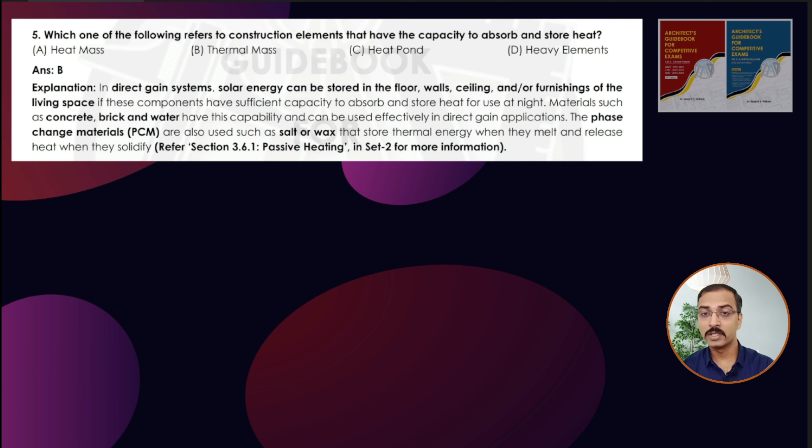So here the correct option was option B. If you have read the theory related to this direct gain system in Set 2, then answering this question would have been very easy. The correct option was option B, so the first 2.5 marks you could have achieved here very easily. So 2.5 is your score till this question, the first question of question 5.

The next question was question 7: Which one of the following indexes is the temperature of calm air at 50% relative humidity, which imparts the same thermal sensation as the given environment? Options were temperature humidity index, thermal sensation index, heat stress index, and tropical summer index. Again, similar to the previous one, we have discussed the theory related to the correct option in two earlier GATE papers - GATE 2022 question 65 and GATE 2018 question 11. You can pause the video and check these respective questions. So the correct answer for this question was tropical summer index.

If you refer GATE 2018 question 11, you can see that the definition mentioned in question 7 of UPSC-CPWD is given in the explanation. So I'm just reading from the explanation. Tropical summer index, shortly called TSI, is defined as air or globe temperature of the still air at 50% relative humidity, which produces the same overall thermal sensation as the environment under investigation or under consideration.

This definition was given in question 7, and they are asking which term this definition refers to. The correct answer for question 7 was option D, tropical summer index. I have also provided the formula to calculate the tropical summer index, which you can see on your screen. Based on this formula, a numerical answer type question was asked in the recent GATE paper, GATE 2022 question 65.

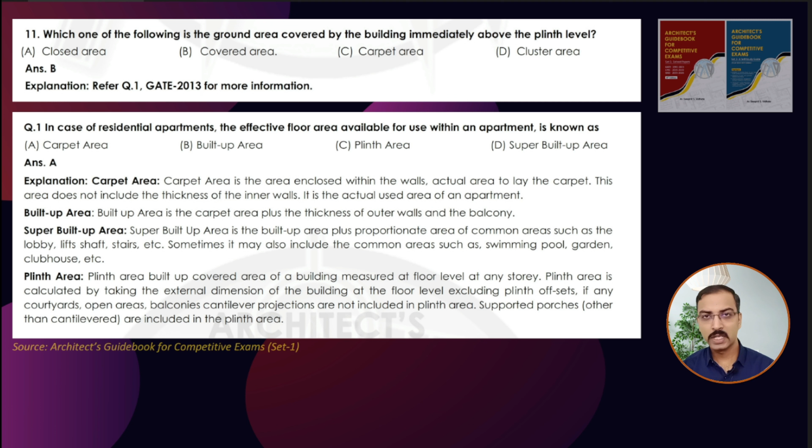But supported porches, other than cantilevered porches, are included in the plinth area. So the correct answer for question 11 of UPSC-CPWD was covered area, option B. Very easy to answer, because carpet area is definitely incorrect, given in option C. Cluster area is not related to the ground area inside a building. Closed area is definitely not a technical term, so it's not correct either. The correct option was B, covered area, adding 2.5 marks, for a total score of 10 till this question.

Question 12: The author of the best-selling popular novel The Fountainhead, that celebrated the idea that the prime generator of built form is the creative power of the individual architect. This question, related to this book and its author, was earlier asked in GATE 2011 at question 37. Selecting option B was not difficult, since most of you must be aware of this author and this book, The Fountainhead. So this was one of the easy questions.

As I said, the related question was there in question 37, where again it was a match-the-pair question. So the answer for question 12 of UPSC-CPWD was option B, adding 2.5 marks, for a total score of 12.5 till this question.

The next question, question 13: as described by Kevin Lynch in his seminal work The Image of the City, which of the following are points referred to as the strategic points in a city into which an observer can enter, and which are intensive foci to and from which he is traveling?

We have discussed the five principles defined by Kevin Lynch in The Image of the City in Set 1 as well as Set 2 of the Architect's Guidebook. The related GATE question was in GATE 2009, question 26, where we explained and discussed all five of his principles and definitions.

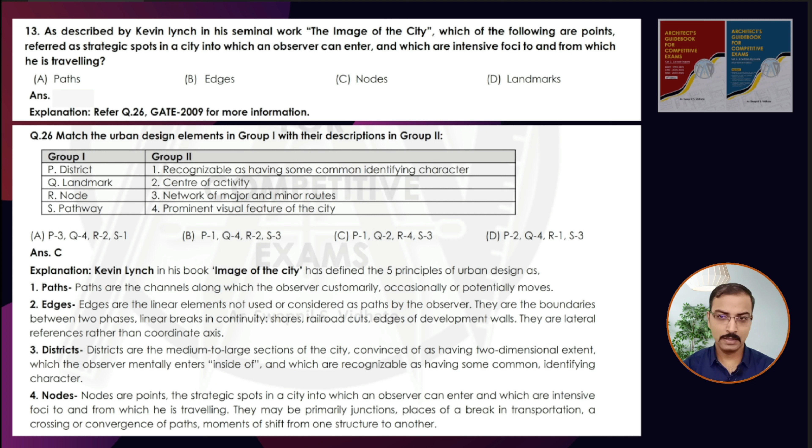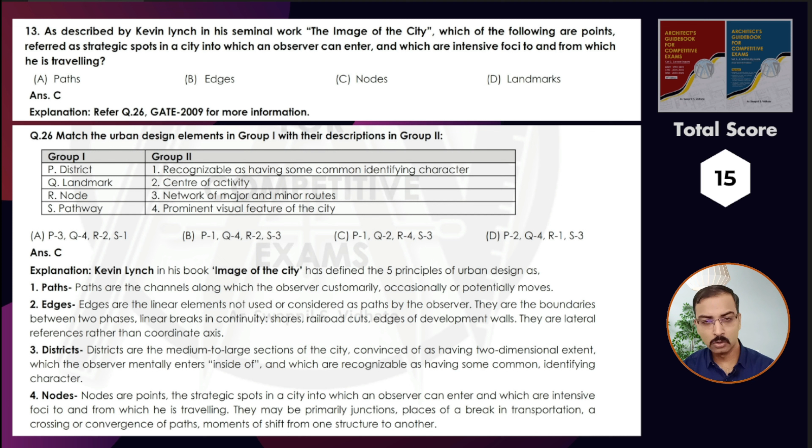So answering this question was not difficult, if you have read and carefully revised both Architect's Guidebooks multiple times. Selecting option C was not difficult. Total score till this question would have been 15.

Question 18, again the easier one: the radiant city concept was originated by. Similar to the previous one, selecting option B would not take more than a second if you have done careful revision of previous year question papers and the theory available in Set 2.

Earlier the question was asked multiple times. As you can see on your screen, question 31 of GATE 2023 was a match the pair question, in which we have discussed that radiant city has been defined by Le Corbusier.

The question related to this similar term was earlier asked in GATE 2021 question 33, GATE 2004, and GATE 2006. You can pause the video and check these respective questions to analyze how many different ways the question has been asked. The correct option was option B, Le Corbusier. Total score till this question would have been 17.5.

The next question: in the context of the seminal work on Cities in Evolution, the pioneer who has articulated the place-work-folk interrelationship is which of the following? Similar to the previous one, we have discussed the triangle given by Patrick Geddes in his seminal work, Cities in Evolution. The related question was there in ISRO 2019, similar to the UPSC-CPWD exam.

This ISRO 2019 was again a recruitment exam paper. Question 50 was based on this information, and the reference was also there in GATE 2005 question 75. As I just said, this question 50 of ISRO 2019 is there on your screen. So Patrick Geddes, who has been called the father of modern town planning, gave this principle, the triangle of folk, place, work.

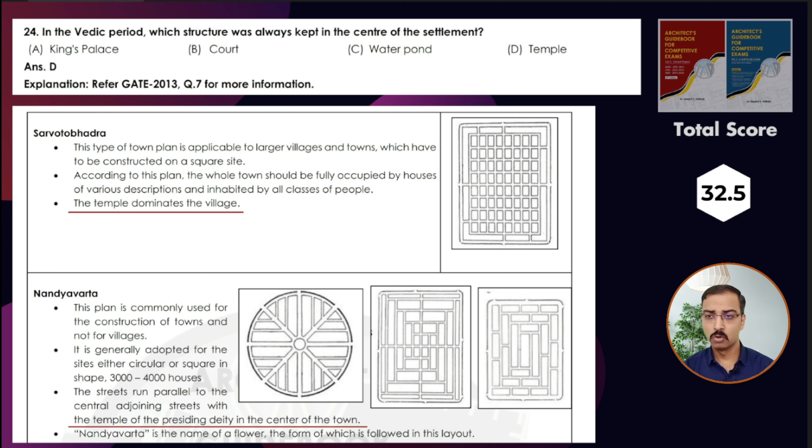Easy to answer because the reference was there in the previous question paper in set 1. So 2.5 more marks you could have achieved here. Total score would have been 32.5.

Question 25. As per the Manual of Architecture Practice of the Council of Architecture, which of the following tenders quotes a fixed price? Please underline this word, fixed price. If the quote is varied, it involves contractual problems and methodology to arrive at the rates for addition, deletion and alteration would be necessary, and it is to be built in the tender document. As soon as you read the word fixed price, you can answer it quickly that it is a lump sum tender.

Why am I saying this? Because we have earlier discussed these types of tenders in UPSC-CPWD 2016 in question 60. Here I have provided the definition. In lump sum tender, the contractor undertakes to carry out the work as shown on the plan and specification till completion. For lump sum tender, your drawing should indicate each and everything, because the contractor will quote his tender price based on whatever is available on the drawing and what specification has been provided related to the plans, sections, or all the quantities shown on the plan.

If in case there are some changes, then the contractor may ask for a different amount which he has not quoted at the time of submission of his tender. So it involves contractual problems. There will always be dispute. He will, in technical term or in government term, call it a deviation order.

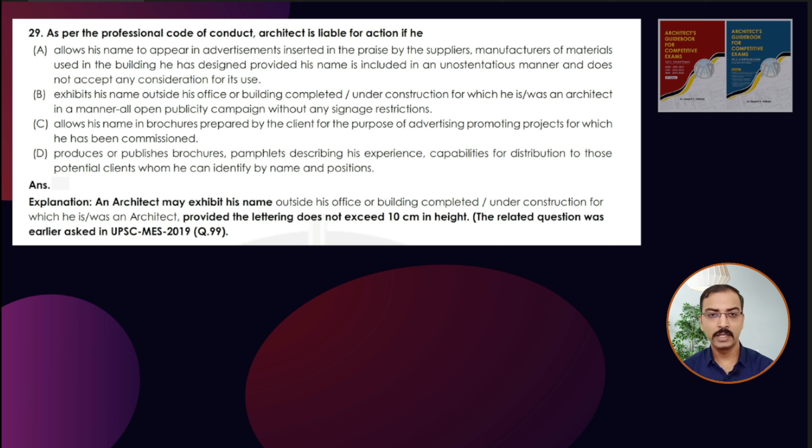The related question was earlier asked in the UPSC MES recruitment exam question paper of 2019, question 99. So the related question was there in the previous UPSC recruitment exam for architects. I think selecting option B was not difficult. Total score till this question would have been 42.5.

Question 31: Dolmen, Robie House, Villa Shodhan and Falling Water are examples of architectural compositions which can be categorized under - options given are A. planar compositions, B. angular designs, C. columnar designs, D. architectural gallery designs. The question related to Robie House, Villa Shodhan, Falling Water and even the Dolmen were asked in previous GATE question papers.

One by one we will go through the options. Robie House, Villa Shodhan and Falling Water - Villa Shodhan designed by Le Corbusier, Falling Water designed by architect FLW. Both these houses do not follow the architectural gallery design pattern, so option D is definitely incorrect.

Option C is columnar designs. Now both houses are not just made of columns - they do not follow only column designs. The same applies for Robie House as well.

Option B says angular designs. Now you can see that all these houses, in plan and section, follow perfectly horizontal and vertical planes - they follow a linear pattern, not angular designs. The walls are not arranged in any angular way, so angular design at option B is also incorrect.

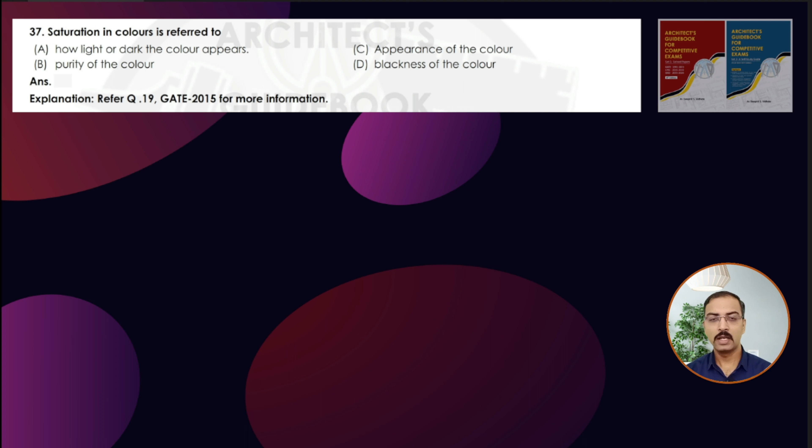Multiple times the question based on color theory have been asked in the previous GATE exam question papers, also in recruitment exam question papers. Question 19 was: the saturation level of a color represents what? The correct option here was brilliance.

Saturation defines how pure or how bright the color is. In the explanation, saturation defines lightness, meaning 100% bright or light color is fully saturated. If you go on adding gray, the fully saturated color will be the pure color, while totally unsaturated color will be the darker one, full of gray.

Question 37: saturation in color is referred to as the purity of color. As explained, saturation defines lightness, meaning 100% original color is the pure color, and as you go on adding gray, it will reduce the saturation level. So option B was the correct one.

Multiple times the question based on color theory have been asked, so it is expected that the candidate is aware and understands each property and its significance by heart. One more question based on color theory was asked in this same exam paper, which we'll discuss soon. So with 2.5 more marks, total score till this question would have been 60.

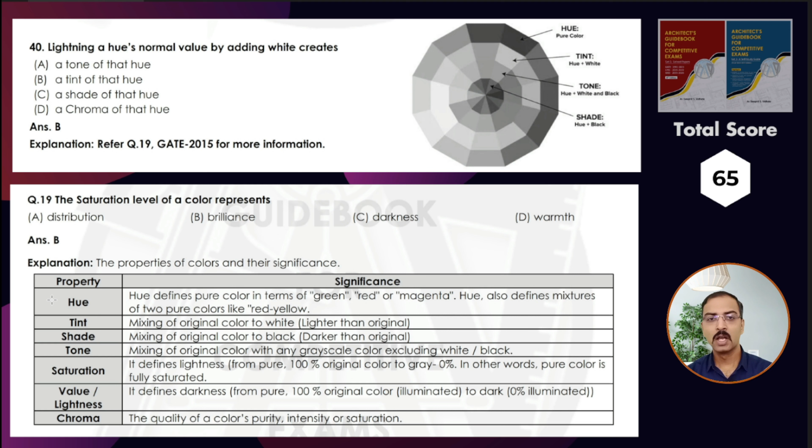If you have gone through this property and its significance, answering this question was not difficult, but for that you need multiple revisions and thorough understanding of this concept of color theory. So total score would have been 65 by adding 2.5 more marks.

Question 41: match the following. In group A they have mentioned the solid forms, and in group B they have mentioned the descriptions. You have to match the correct pairs. Group A has mentioned sphere, cylinder, pyramid, cone. We will go by the description given in Group B one by one.

The description mentioned at serial number 1 is a solid generated by the revolution of a right triangle about one of its sides. Consider this right angle triangle, and you are revolving it along one of its sides. When you revolve the right angle triangle along this side, it will create the cone, which is mentioned at serial number S in group A.

So the first correct pair will be S1. Observing options A, B, C and D, the only option which matches this correct S1 pair is option B. So none of the other options are correct.

You can also check the other pairs. In option B, they have matched R with 2. For R, pyramid, they have matched a polyhedron having polygonal base and triangular faces meeting at a common point or vertex. Yes, that is a correct explanation — pyramid has a polyhedron with a polygonal base and all its faces are triangular, meeting at a common point or vertex.

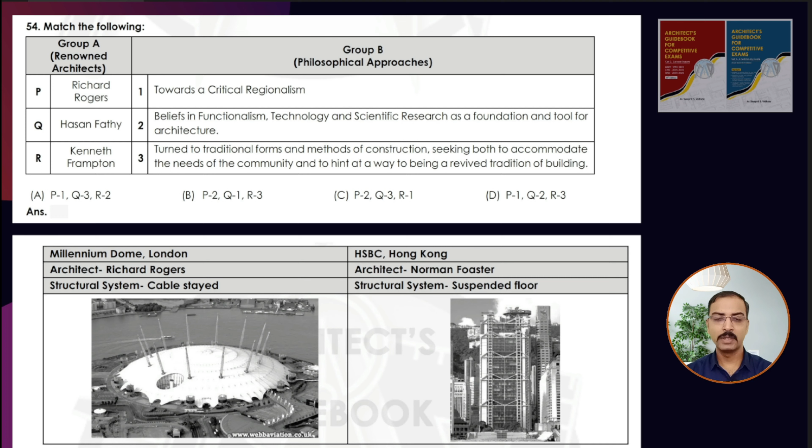The only remaining architect mentioned at serial R, Kenneth Frampton, is famous for his essay on the subject of 'towards a critical regionalism.' So the last and only remaining pair is correctly mentioned at option C, which was the correct answer for question 54.

So you could have selected option C because the question based on the work of architect Hasan Fathy, the Egyptian architect, was there in one of the previous question papers. And again, Richard Rogers is associated with functionalism, use of technology and scientific research, for this particular question 54 of UPSC CPWD. So total score would have been 77.5. I have considered 2.5 marks for this question.

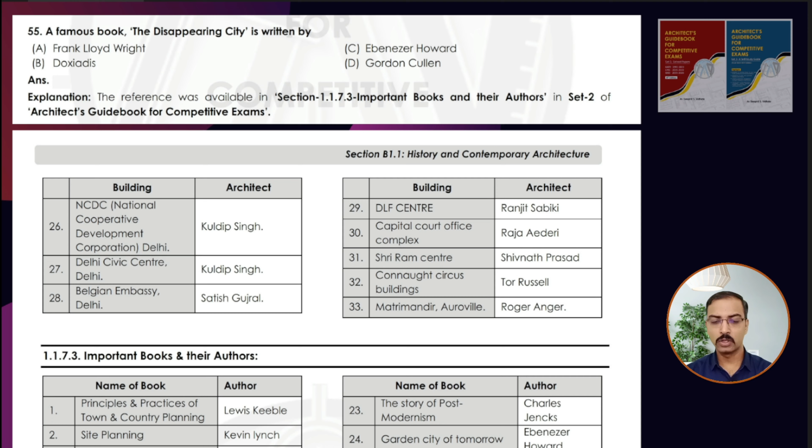The next question, question 55: a famous book Disappearing City is written by which of the following architects? The reference was readily available in section 1.1.7.3, in which we have discussed important books and their authors in set 2. I will show you the list - this subsection, important books and authors, in which I have covered at serial number 38 this Disappearing City, which is written by FLW, Frank Lloyd Wright. So selecting option A was the easy one because you have read this in set 2. If you have done multiple revisions of set 2, then answering this question was very easy. So more 2.5 marks I will consider, and total score would have been 80 till this question.

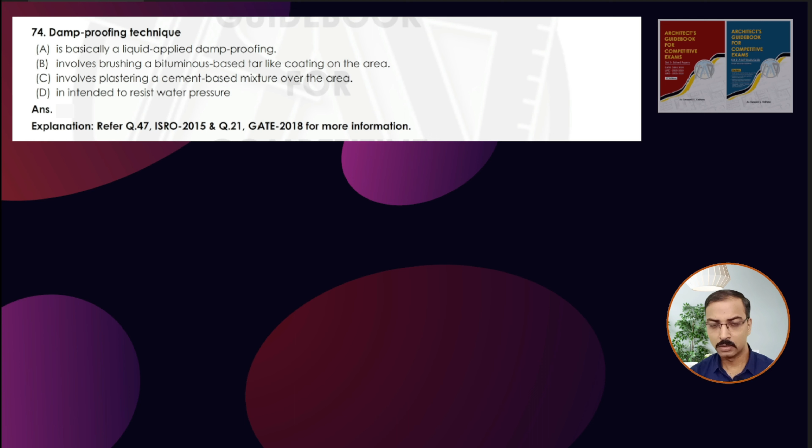So option B was the correct one. The reference was available in ISRO 2015 question 47 and GATE 2018 question 21. In ISRO 2015 question 47, one statement asked which of the following statements are true, and sentence number 2 mentioned bitumen felt is used as a damp proofing material. This sentence was correct, so statements 2 and 3 were correct. You would have read this in that recruitment exam question paper. So for question 74, the correct option was B. More 2.5 marks could have been added here, total score would have been 97.5.

The next question, question 75: which one of the following is the maximum population size of a species that an ecosystem or habitat can support indefinitely? Options were A maximum, B sustainability, C carrying capacity, D biomagnification.

The information related to the correct option for this question was available in GATE 2022 question 77, which asked: which among the following is or are the components of the assimilative carrying capacity of urban environment? Notice the word carrying capacity. As discussed in the explanation, assimilative carrying capacity is defined as the ability of the environment or a portion of it, such as streams, lakes, air mass or soil layer, to carry waste material without adverse effect. Beyond a certain limit there will be environmental degradation - the environment can't carry a lot of burden beyond a certain threshold, its carrying capacity. As given in question 75, the maximum population size of a species that an ecosystem or habitat can support indefinitely is called the carrying capacity.

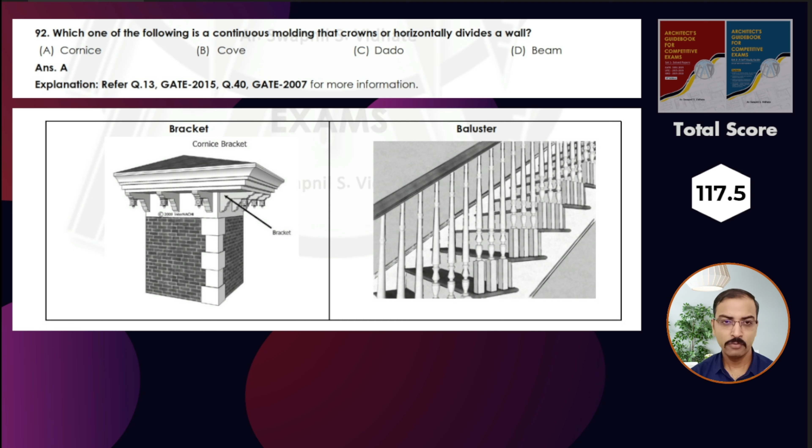Question 93, which one of the following is a measure of brightness of a light source or an illuminated surface? The information was readily available in GATE 2006 at question 68, where we discussed all these terminologies. The correct option was option D, luminance. Luminance is the quantitative property which gives the strength of the source of light. Whenever you go and buy a light source, we generally ask what is the luminance that particular light source is providing. So brightness of a light source or illuminated surface is measured in terms of luminance, which is option D.

So the reference was readily available. I will consider 2.5 marks for this question. Total score would have been 120 till this question.

Question 95. Which one of the following is the key proponent of 7 principles of universal design that is also widely applied in the design of interior spaces as well as outdoor environments? Options were Ronald Mace, Marion Roberts, Nabil Hamdi, and D. Frank Lloyd Wright.

Now, this question related to universal design was previously asked in GATE 2022 at question 40. Also, the question was there in GATE 2014 at question 47 and GATE 2009 at question 25.

So the architect who coined this term universal design is Ronald Mace, which is mentioned at option A. He gave the 7 principles of universal design.

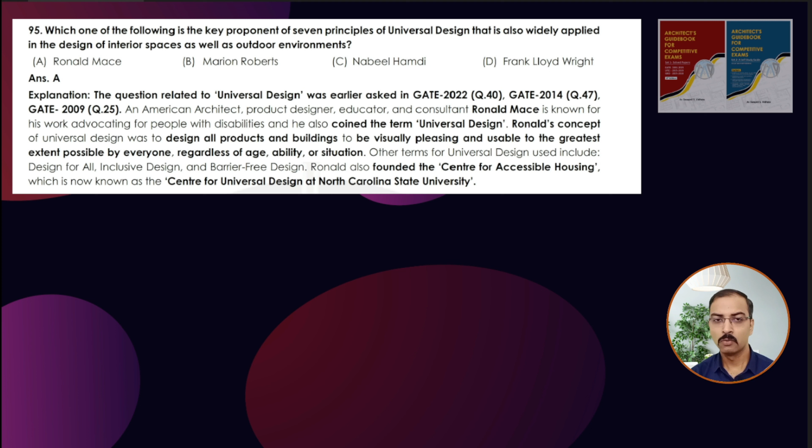If you have done the revision and in your notes made this addition that this universal design term was coined by this architect, then selecting the correct option for this question was not that difficult. Total score would have been 122.5.

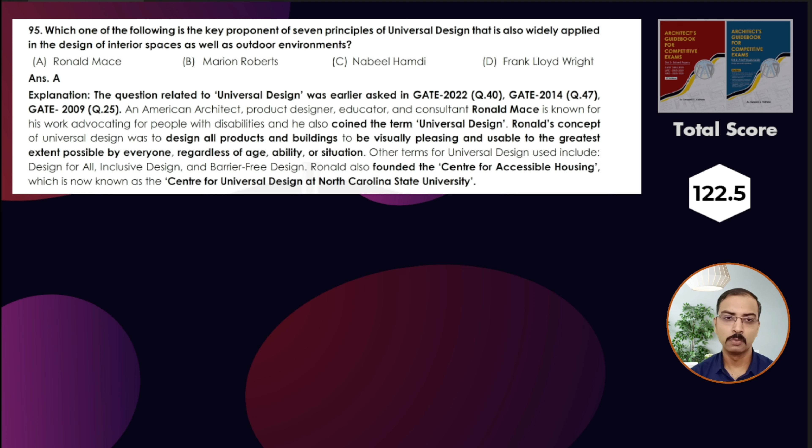The next question, a little bit tricky or difficult, but we have also covered the theory related to the correct option. Question 98 was, which one of the following provides to describe design principles and elements, that is contrast, symmetry, wideness and constriction, threshold and vistas.

Which can help the designer to control spatial compositions in design? Option A, imageability, B, theories of Gestalt, C, figure ground thinking, and D, Bauhaus techniques.

The correct option for this question was theories of Gestalt, according to me. The reference was there in GATE 2011 at question 34. We have discussed all his laws, Gestalt laws of visual perception, in set 2 as well as in set 1.

So the correct option here was option B, theories of Gestalt, right? Total score till this question would have been 125.

The next question, 101. Which one of the following is the lowest inside point of a pipe, culvert or channel? So a similar question was there in one of the previous question papers, in GATE 2015 at question 20.

Question 20 says invert level of a pipe at a given cross section refers to. So the question was the opposite in nature.

In question 101, they have given the definition and they are asking which is the suitable term for this definition. In question 20, they have mentioned the term, and we have to select the corresponding definition from the given options.

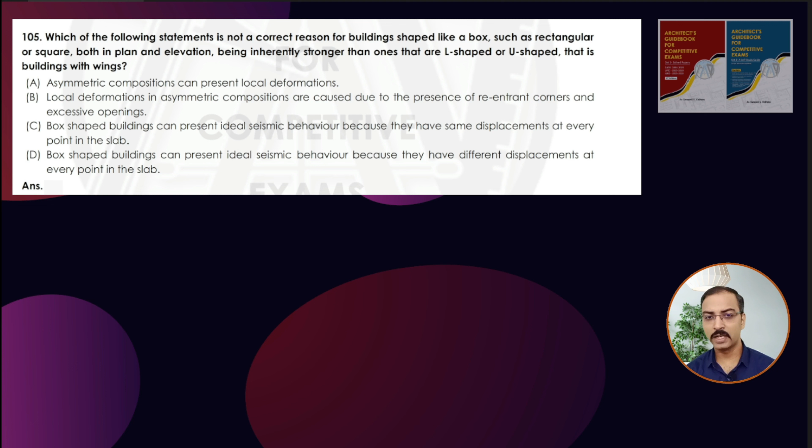Now this is the incorrect statement. The reference was there in UPSC-MES 2019 question paper at question 12.

A similar question was there in UPSC-MES, question 12. You can see on your screen: for minimizing the impact of earthquake, which of the following solutions are proposed for an L-shaped building? We have to select which solutions we can choose among the options given.

In question 34 of GATE 2018, we have also discussed the solutions or building structures, shapes and configurations for earthquake-resistant buildings. We discussed that box-shaped buildings are ideal if we talk about earthquake resistance, since they present ideal seismic behavior because they have the same displacement at every point in the slab, which is given at option C, the true statement.

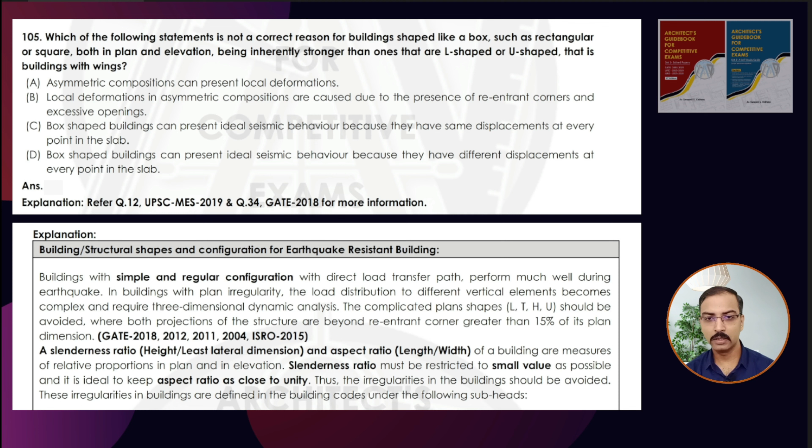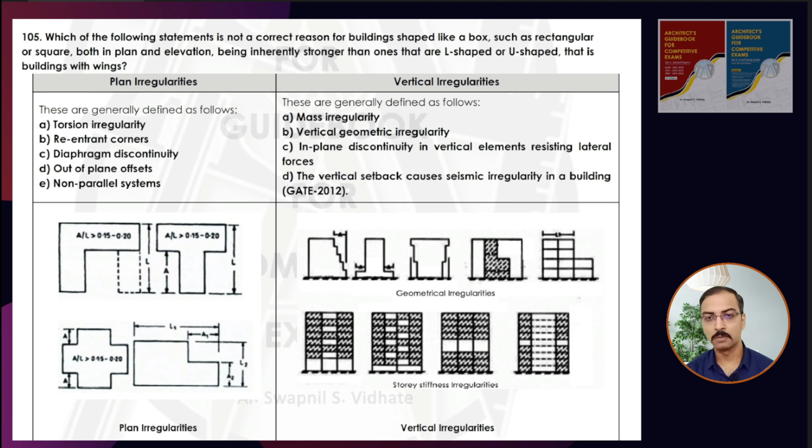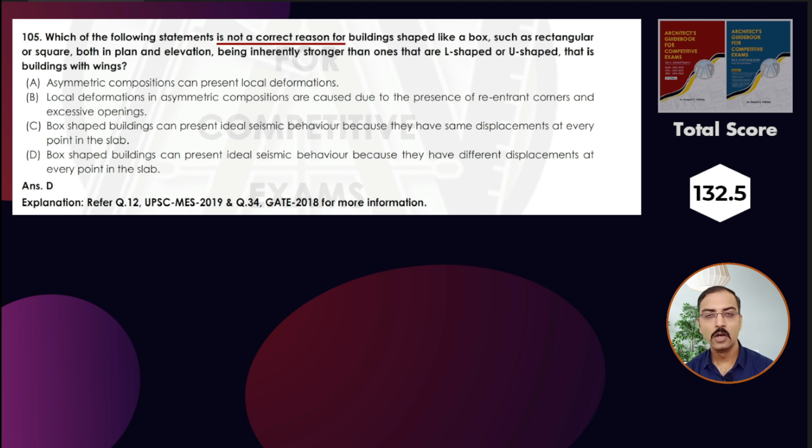Here, since we have to select the incorrect statement, option D will be the suitable one. As I said, in question 34 of GATE 2018, you have this explanation given about what kind of irregularities we should avoid while planning a building to make it an earthquake-resistant structure. So option D was the suitable one, the incorrect statement. Since the references were available, I am considering that the candidate answered it correctly, so 2.5 more marks I have considered. Total score would have been 132.5 till this question.

The next question: which one of the following is an area of uniform environmental conditions providing a living space for a specific assemblage of plants and animals? Options were biotope, biodiversity hotspot, C is patch, D is eco-sensitive area.

A little bit tricky or difficult question, but the reference related to this term mentioned at option A, biotope, was there in a previous year's question paper. It was there in GATE 2020 at question 37, where we discussed the biotope factor. Biotope is synonymous with the term habitat, meaning that the environmental conditions are the same in that particular area where you will find similar kinds of species of plants and animals. So option A was the correct one here.

As I said, I'm just showing you question 37 of GATE 2020, where the question based on biotope factor was asked. Biotope factor, or biotope area factor, is an ecological parameter which establishes the proportion of the area to be left as green space in new building development. In simple language, it is just the open area where you can have green spaces, including courtyards, roofs, and walls where you can develop greenery. So this question related to biotope factor was earlier asked in GATE 2020 at question 37, and here the correct answer was biotope.

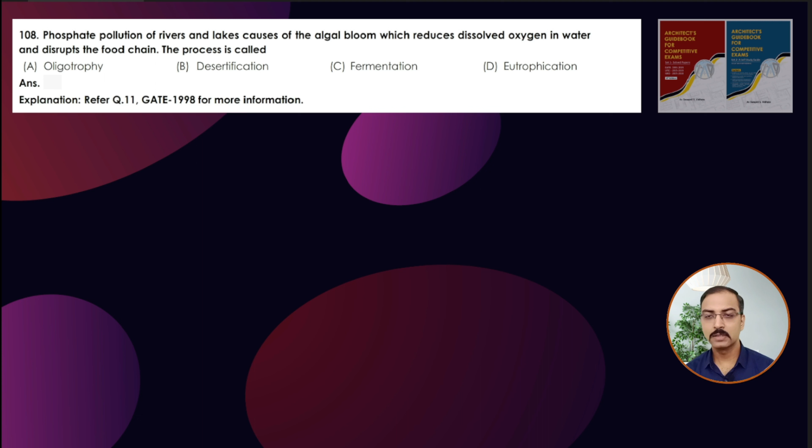Now fermentation and desertification are definitely incorrect. The answer was available in the GATE 1998 question paper at question 11, which asked: the phenomena of degrading water quality of natural water bodies due to decomposition is called what? There you will find the correct option, which is eutrophication.

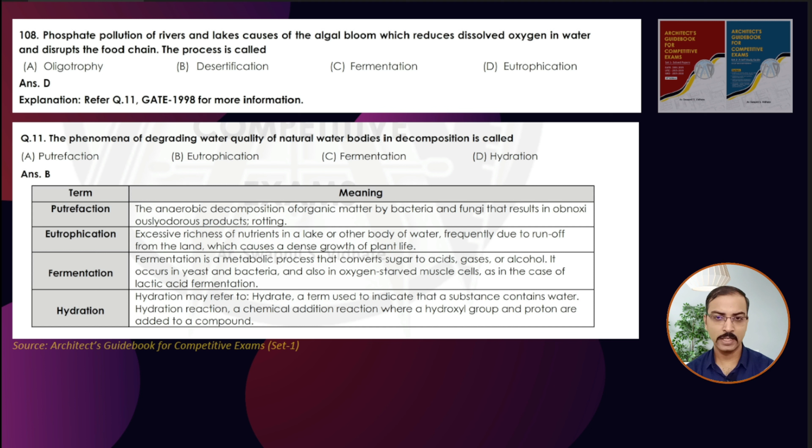You would have read the definition in question 11 of GATE 1998: excessive richness of nutrients in a lake or other water body, frequently due to runoff from the land, which causes a dense growth of plant life. Here they mentioned just the algal bloom. So the correct option here was option D, eutrophication, which was already provided in the explanation of GATE 1998 question 11, so answering this question was easy.

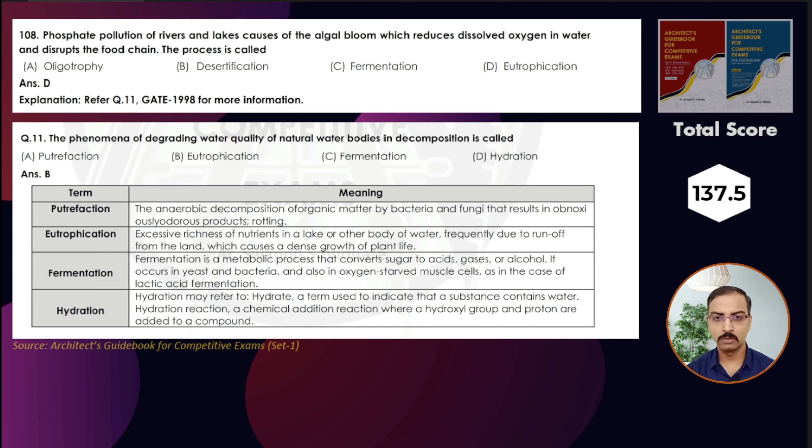If you had done multiple revisions, you could have answered this question quickly. Total score would have been 137.5.

Next question, again the easy one, 109. Which one of the following is elevated temperatures in urban areas caused by heat fluxes due to the presence of buildings, roads, and so on, and to emissions of pollutants? Options were greenhouse effect, carbon trapping, heat island effect, physical weathering. The answer was very easy. It is option C, heat island effect.

The reference was there in GATE 1995 at question 2. Also the similar question was asked in GATE 1993 at question 10, then UPSC-CPWD 2015 at question 24, then GATE 2011 at question 10. You can check these respective questions in set 1 of Architect's Guidebook.

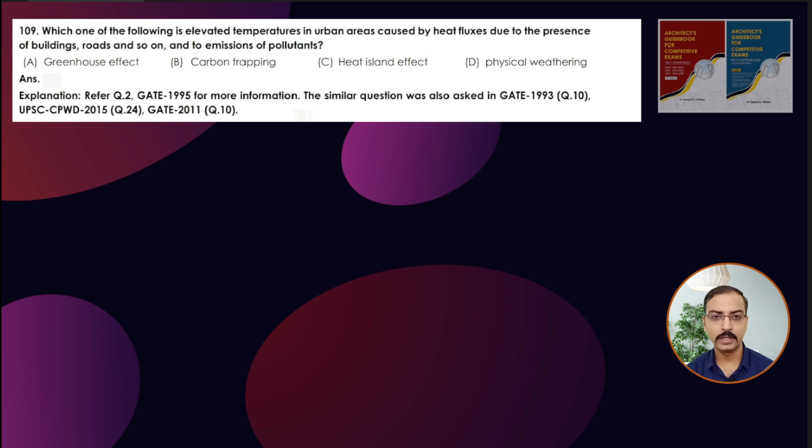Total score till this question would have been 140.

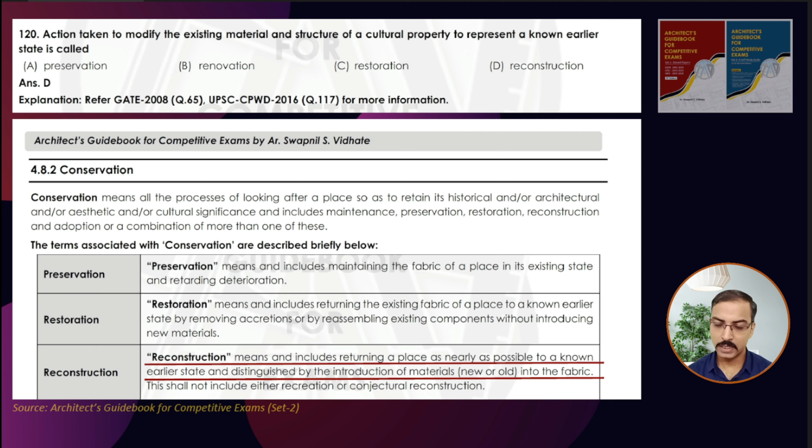Because the theory was available, and we discussed it in one of the previous year question papers, selecting option D was not difficult. This question was the easy one to answer. So total score till this question would have been 155, which we discussed in the beginning. So friends, that was the last question of this question paper.